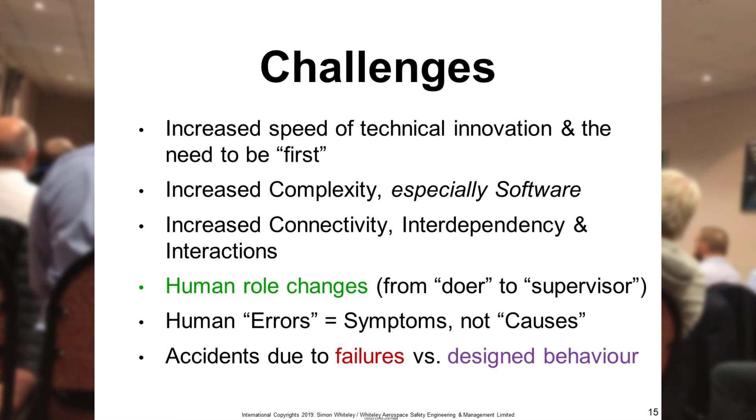Now there are a few ways to deal with complexity. The traditional approach is what might be called divide and conquer, or analytic reduction. So what we do is think about the physical aspects, the functional aspects, and divide them into distinct parts. Then we think about behavior, and divide behavior into distinct events over time, or what you might be familiar with as chains of events.

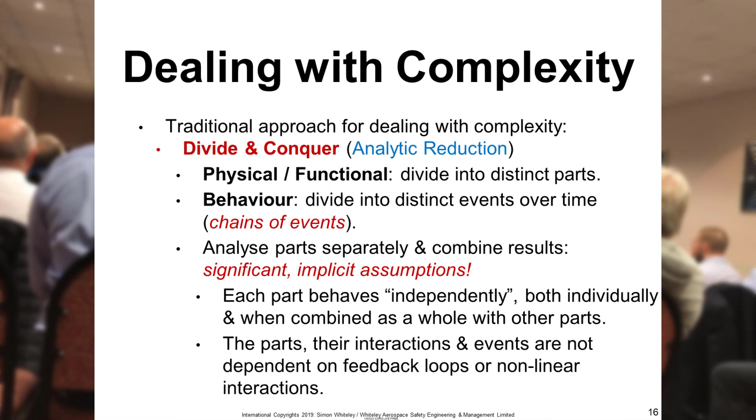Then we analyse those parts separately and combine the results. But by doing that, we make some significant but implicit assumptions, especially when the system is really complex. One is that we presume each part behaves independently, either individually or when combined as a whole with other parts, and that the parts themselves, their interactions and events, are not dependent on feedback loops or non-linear interactions.

So an approach to deal with complexity - it's called a new approach but it's been around for quite a while, and we use it as part of systems engineering - is to use systems theory, or the process of synthesis. So we think more about the holistic, the big picture, as opposed to focusing on division. We think that everything is part of a system, however we define that system, so it's got a boundary, it's got some interactions across the boundaries. We think about components of the system and interactions amongst them, and about feedback loops and emergent properties.

So this is where we start talking about STAMP. When we say STAMP, we're referring to an acronym that stands for Systems Theoretic Accident Model and Processes. So it's two broad things.

And it originates from - hands up who's familiar with Nancy Leveson from MIT? A few people? Hands up who have no idea who she is whatsoever? A few people, wow, more, that's great, okay. I'll let you find that out as your homework. So Nancy is a professor at MIT in the US.

She devised the STAMP-based approaches and wrote about them in her second book, Engineering a Safer World. She's very kindly made that book available for free, so if you go to the MIT Press website, you can download it as a PDF and read it at your leisure. Myself and Nancy also did a YouTube video introduction, which you're welcome to watch at that link - I'll give you the links later on.

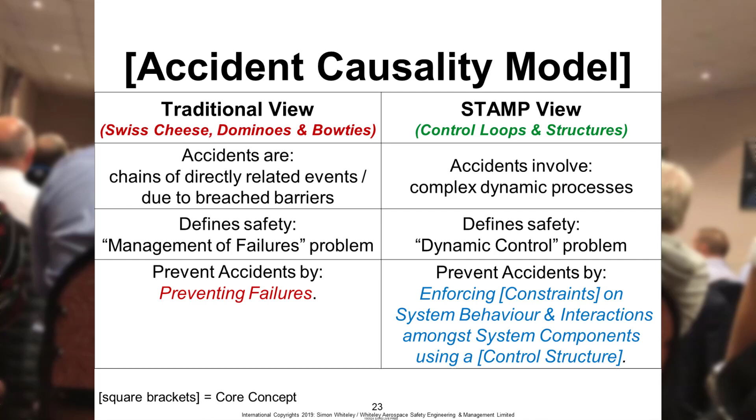And it essentially prevents accidents by enforcing what are called constraints or requirements on system behaviour and interactions amongst system components using a control structure. Now, I've used a lot of technical words there, and that's because the STAMP-based approach is based on systems theory and control theory, and that's where the language really comes from. So it'll be very familiar to systems engineers, maybe not so much to non-system engineers.

And the STAMP-based approach is very much focused around this concept - the concept of a control feedback loop. Hands up to see whether this is familiar to you. Does this look familiar to you? There's a few people there. Anybody it's not familiar to? No one wants to put a hand up. In a different guise, we've seen it, but not quite. Okay, well I'll talk a little bit about it just to give you a bit of insight.

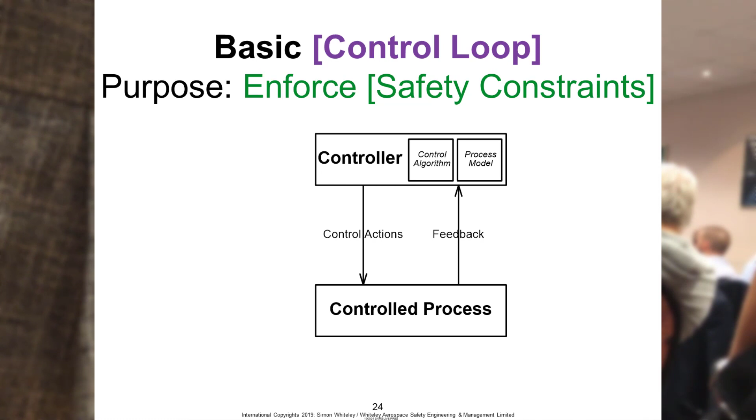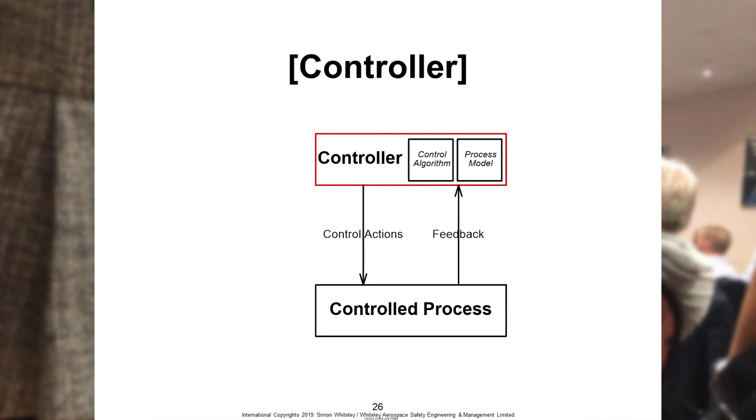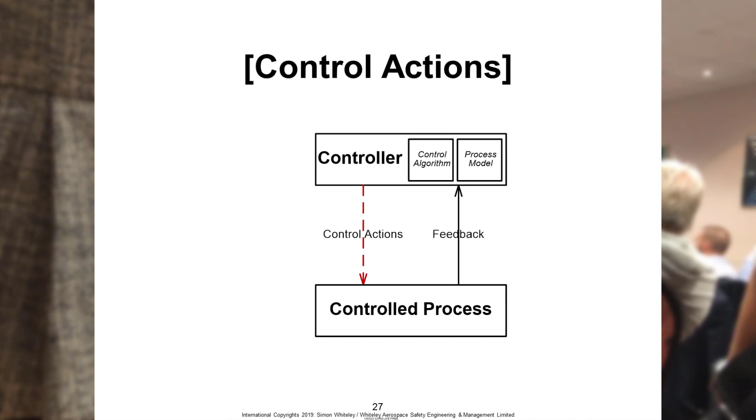So the basic intent is accidents are complex dynamic processes. So we think about managing safety by using these control loops. And conceptually, we have what's called a controlled process at the bottom. So this could be a physical process, it could be some equipment, it could be an organisation, it could be a team of people. It's abstract, it can be applied to anything like that. And that controlled process is under the conceptual control of a controller. That could be hardware, software, humans, organisational, however you see fit in the context of what you're looking at. And it controls the process through what are called control actions.

And when we're talking about what causes accidents, in the concept of STAMP, we talk about unsafe control actions. Now, when we're talking about accident investigation using the STAMP-based approach, we can't really use the term unsafe control actions because that implies judgment upon the actions of individuals that may have been killed. And so when we're doing an accident investigation, we want to avoid inappropriate judgment or biases. So when we're talking about accident analysis using STAMP, we refer to what are called contributory control actions. Conceptually, they are the same, but when you're dealing with accidents, it's not really appropriate to use judgmental language.

Now, there are four general types of contributory control actions. The first is a control action required for safety is not provided. And if you're familiar with the functional hazard analysis approach, that is very similar to loss of function.

An unsafe control action is provided. A potentially safe control action is provided too early or too late, or at the wrong time or in the wrong sequence - that's the concept of timing and sequencing. And then we've got a control action required for safety that is stopped too soon or applied too long, and that's about the duration of the control action. Does that make sense? Is everybody following that?

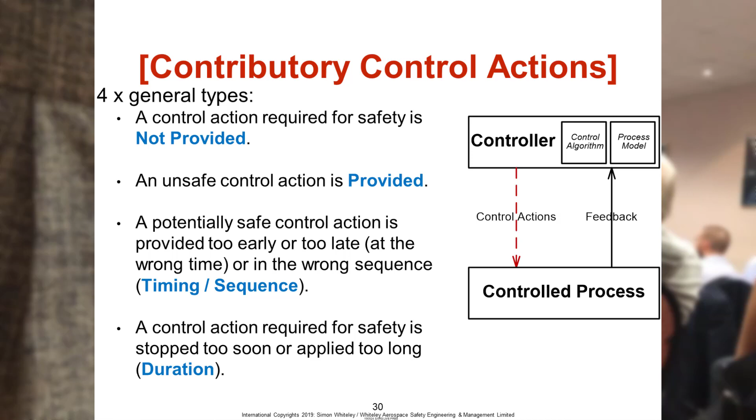Excellent. So once we've thought about the unsafe control actions, we then start to think about how does that feedback loop contribute to enabling that control action to occur. And so we think about looking round the control loop, looking at the controller, these concepts called algorithm and process model - I'll come to those - and then the feedback.

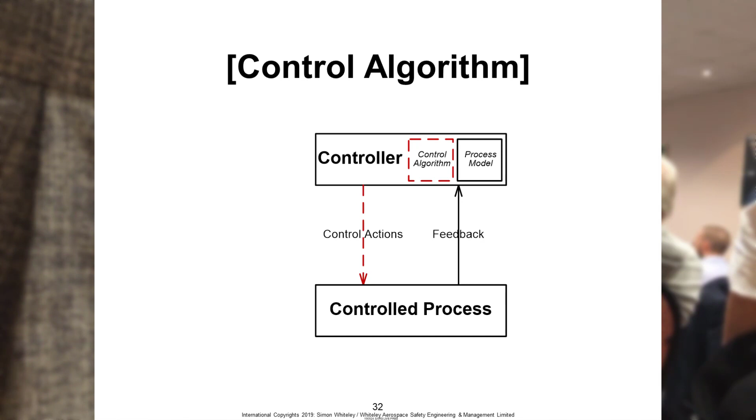So the first is a control algorithm. What's that? Well, conceptually, that's a label for something that defines the behavior of the controller. So if you're driving your car, your control algorithm is how to operate your vehicle - if you drive a manual car, how to use the gears and the clutch. If you drive an automatic car, the algorithm is knowing what to do when you come to a stop, and you don't take your foot off the brake and let it drive off on its own.

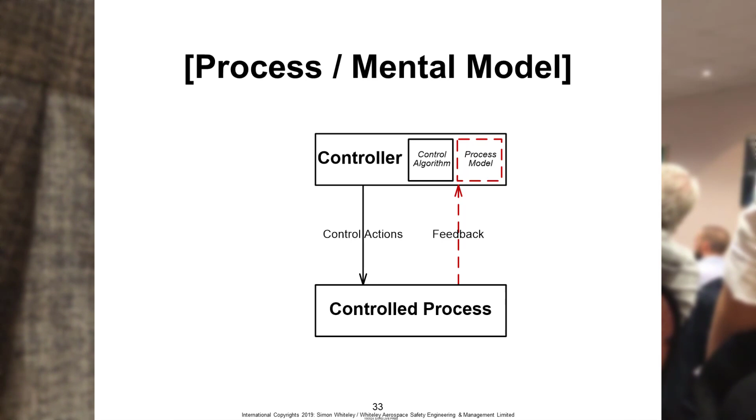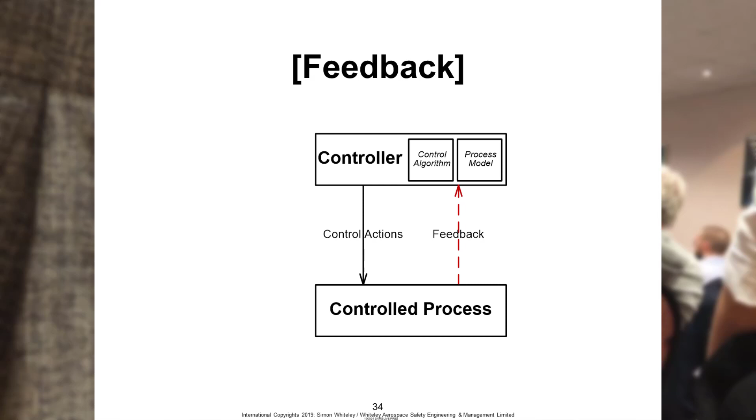The process model, or mental model if we're talking about a human, is essentially a model of what's going on in the control process - a representation of what's going on in this process. And it is based upon feedback. So feedback is provided to the controller, which updates its process model. The controller then uses that information and its algorithm to define how it provides control actions. Does that make sense? Excellent.

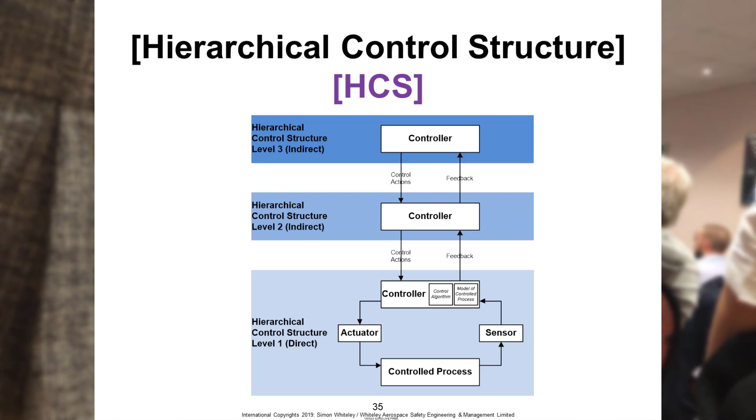Great. So once we've thought about one control loop, we then start thinking about looking at a hierarchy of these control loops. This allows you to think about physical processes. So if this is your brand new autonomous car, this is your autonomous AI controller, this is you sat in it - it's not a driver's seat anymore, so wherever you're sat in the car - and then above you it might be the designer of the autonomous vehicle providing you instructions on how to operate the car. These basic concepts of control loops and control structures enable you to model pretty much any system you can think of, whether it's computing or a social system, organizational, and it allows you to identify potential safety issues that you can then deal with.

Now, one of the most powerful things I think about the STAMP-based approach is the concept of these control structures, because it allows you to think about - this example is an air traffic control example - an aircraft and its trajectory, the aircrew on board, an air traffic controller, airport or ATC management, airline or operator, but it also allows you to think about the life cycle of the system: the system designers, the assumptions they make about the design, the operator, the maintenance structure, the emergency response structure, and then at the very top, if you want to go that far, you can look at governmental, legal and regulatory control structure. So I'm hoping by now you can see that you can use this for a very technical analysis of a complex system like a weapons system or an autonomous car, but you could also look more broadly at the sociotechnical context and how these systems are operated.

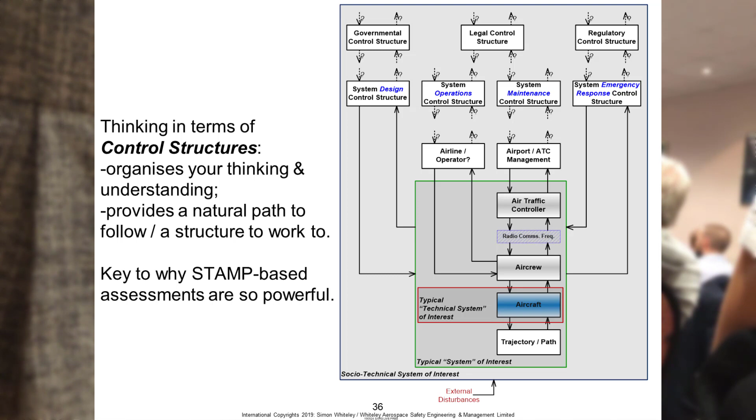Hands up who can tell me which accident this relates to. Tenerife - it is Tenerife, yes. What made you see that was Tenerife? Air traffic control, KLM aircraft.

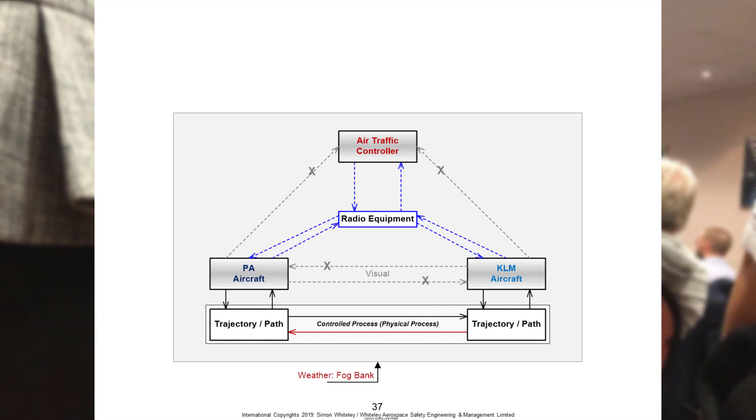Okay, yeah, excellent. So the first thing is this is just a very basic control structure, but you can see how much information you can cram into this just from a few boxes and a few arrows. Now this one's a bit fancier because it's got some colours and some dotted lines, but ultimately it's just some boxes arranged in a hierarchy with some arrows depicting feedback. So at the bottom here we've got the controlled process, the physical process, which is the trajectory, or more precisely keeping the trajectory of two aircraft away from each other. It's under the control of two aircraft and their aircrew, and then of course an air traffic controller at the top.

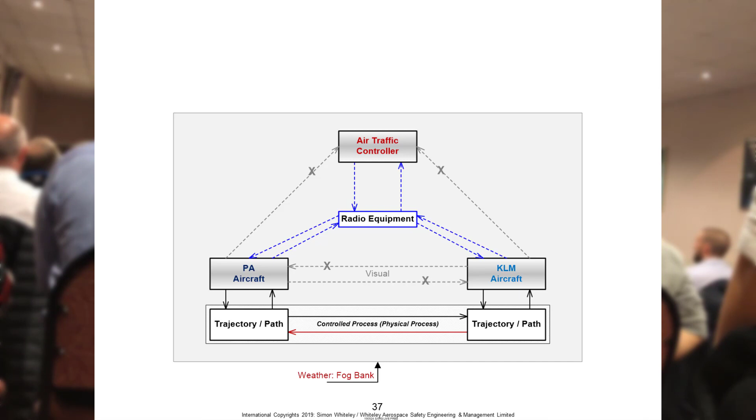Now this particular control structure shows two feedback loops between the air traffic controller and the aircraft. One is via the radio equipment and one is via visual feedback. So normally the air traffic controller can see out the window of the tower, but on this particular occasion, this particular airport was susceptible to significant fog that arrived very quickly. So all of a sudden you've got two huge 747s in the fog on the same piece of tarmac. They're talking on the radios, but you can't see them out the window. So the feedback to the air traffic controller is lost. And so you're essentially reliant on people talking over the radio to make sure that they don't crash into each other. And we know that that was unsuccessful.

It appears from the cockpit voice recorder that the captain thought that they'd been given clearance to take off and that the runway was clear. This aircraft was still on the runway and then began to take off. Now the flight engineer, if you look at the transcript, actually heard the ambiguity in the radio transmissions and questioned, is this guy actually clear? Unfortunately there wasn't enough time to stop the plane and prevent an accident.

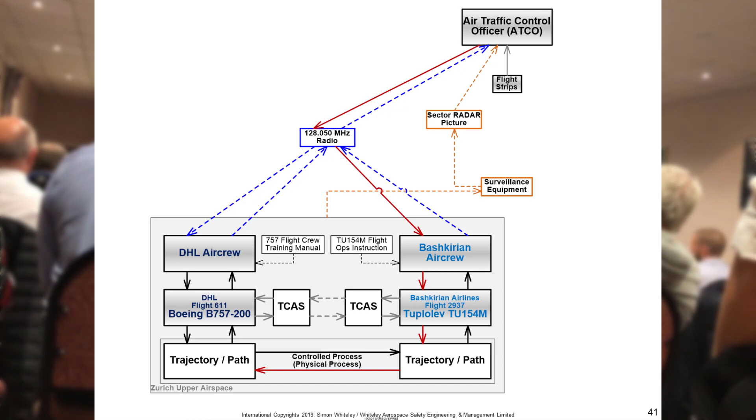So the TCAS says go one way, they go that way. Whereas the Russian crew, as part of their training, they're told to do what the air traffic controller tells them to do. So the air traffic controller told them to take a particular evasive action, which was contrary to the TCAS. But their procedures, their rules were do what the air traffic controller said, which was contrary to TCAS, and they collided. It was very serious.

Now we can look at this one even more. So it wasn't just pilots or aircraft or failures or anything like that. There were issues more deeper in the system.

So in this case, we've got the actual air traffic control technology. That includes radio communications, telephone communications, short-term conflict alerts. So they have a radar screen that tells them when aircraft are on a trajectory. We've got a radar picture.

Now, on this particular occasion, there are two radar sectors. So this sector, this technology looks after this piece of airspace, and this sector looks after this piece of airspace. Now, normally, there will be two air traffic controllers, one for each sector. But on this particular occasion, this one air traffic controller was looking after both sectors.

And this aircraft arrived, it was a bit of a disturbance, it was a late arrival, and it distracted this air traffic controller from looking after both of these sectors, and that's what contributed to him not seeing the aircraft on a conflicting trajectory. Now, there are many reasons why that was the case, but what I want to highlight here is just by representing the control structure, you're able to see the difference between work as imagined, if that rings a bell, and work as done, how it actually is, how it's tolerated by the organisation.

Now, this particular air traffic control organisation tolerated this operation for many years. So they were operating at increased risk for a long time before the slices of the holes in the cheese aligned and we had this accident.

Now, I talk about control loops and control structure modelling as almost like a jigsaw. You're trying to look for the jigsaw pieces in the accident, the control loops, and you're trying to see how they fit together in a hierarchy. So it is really like trying to put a jigsaw puzzle together.

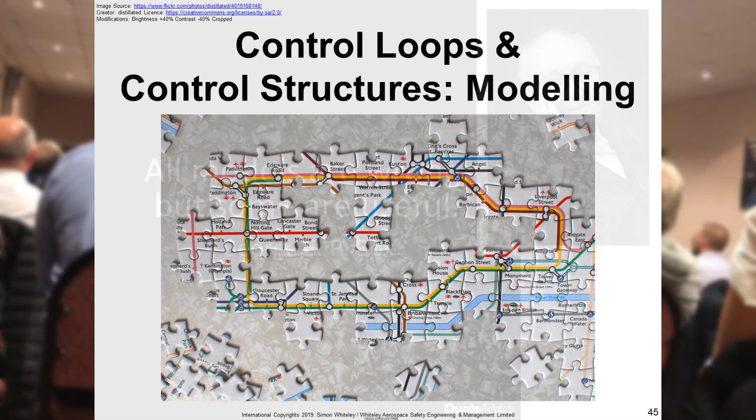But of course, this gentleman, George E.P. Box, you're probably familiar with him, maybe not. He's a world-famous extraordinaire statistician, and he said once, all models are wrong, but some are useful. You might have heard of that. No? Okay. But he also said that we need to remember that all models are wrong. The practical question is how wrong do they have to be to not be useful?

So all I'm really highlighting there is that these are control structure models. They're not the real system. They're our understanding of the system, and they enable us to analyse these models and get valuable results.

Okay, so what are the STAMP-based processes? I'm going to give you some bonus information here. I'm not just going to talk about CAST, I'm also going to talk about STPA. There are technically 4 model-based analysis processes based on STAMP. So when we say I'm going to do a STAMP analysis, you can ask somebody which one do you mean? STECA, STPA, STPA-Sec or CAST? Which one are you talking about?

STECA is what's called Systems Theoretic Early Concept Analysis. I'm sorry about the acronyms, I didn't choose them, they're a bit of a mouthful. But this is essentially applying the STAMP-based approach during early concept analysis. Before you've got a design, before you've got a concept of operations, you can literally take a paragraph of text about what you intend to do, and start to iterate that using STECA to develop a more robust, less risk design, very early in the concept stage.

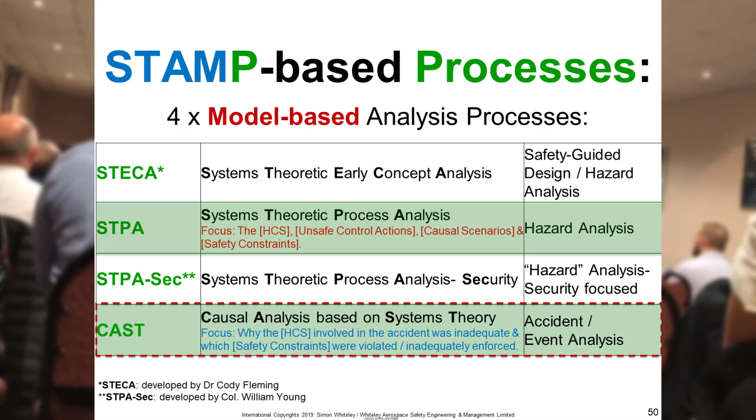STPA SEC is basically a cybersecurity focused STPA. And then CAST, accident analysis, which we'll talk about today. That stands for Causal Analysis based on systems theory. So this is looking at an event, an incident, a near miss, or an accident, so after the fact.

Right then, so CAST accident analysis overview. Hands up who does investigations as part of their work or has done it in the past. You do. Okay, great, excellent.

So this is a very high level investigation process. First you observe the accident scene or the situation that you're dealing with. You then document what you've seen, and then you plan what are we going to do to investigate this, what resources do we need, what specialists. If we're doing an aircraft accident investigation, we need to read the data recorders, we might need an engine specialist, we might need an aircrew specialist, all of those things.

As part of that activity of doing an investigation, we will establish some facts, we will do some form of analysis, maybe a bow tie analysis, something like that. We will establish some findings based on that analysis, form some conclusions, and make some recommendations. Now when we're talking about doing a CAST accident analysis, we're referring to this phase, this part of the overall investigation process. So CAST is not the investigation process, it is the analysis part of an investigation process. Does that make sense? Everybody, great, excellent, okay.

Now as you get more advanced using CAST, more experienced, you could actually use CAST accident analysis to help you plan. So as you saw from that control structure model, when you receive the first information about an incident, you will start to build that control structure model, and that will help tell you what specialisms you need as part of your investigation. So if you see, in the case of the Uberlingen accident, the Russian air crew followed what the air traffic controller did, which was in accordance with their procedures.

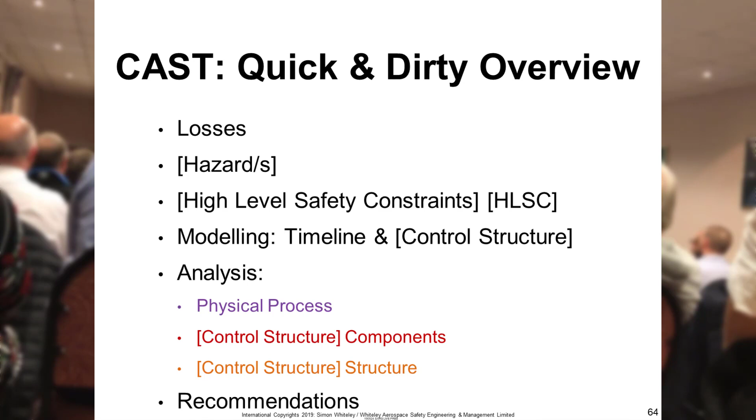Then we do some modelling, so we'll create a timeline of the accident if we have the information available, and then we create the control structure model. Then we do the analysis of the model, and that is done in 3 parts. The first part is the physical process, so what is the physical mechanism of the accident? Was it a failure? Was it an impact? Was it a loss of safe separation? Then we look at the control structure, and first we look at the components of that structure, whether it's hardware, software, humans, organisations, and then we look at the structure of that control structure and how that contributed to the accident, and then we make recommendations.

Excellent. Is everybody following where I am so far? Are we all? Great. So then, let's get on the case study.

So the aircraft fan cowl door loss, London, United Kingdom, May 2013. So this case study is based on one source of information, which is the official investigation created by the Air Accidents Investigation Branch.

Essentially, and I'm not going to make you read all this, essentially an aircraft took off from London Heathrow Airport with the fan cowl doors on the engines unlocked. So as the aircraft sped down the runway, the airflow over the airframe caused the doors to open and essentially ripped off as the aircraft took off. And in the doors being ripped off, the right-hand engine suffered significant damage to the fuel system, the hydraulic systems, and the engine control wiring on the outside.

And later, while the aircraft was flying around over London, a fire developed in the right-hand engine, which required them to shut the engine down. So we had a 2-engine aircraft flying low over London with 1 engine, and then they fortunately safely landed at Heathrow and they put the fire out, everybody evacuated. In a nutshell, that's what happened.

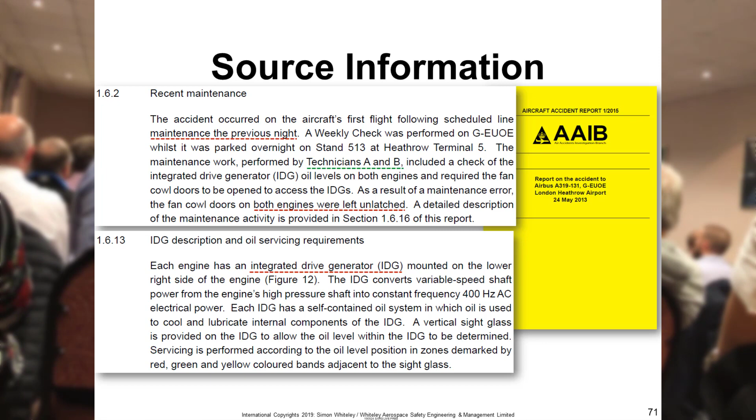Now, when we go back to how the aircraft doors basically got broken off, the reason the doors were unlocked was because of a recent maintenance that was done overnight, literally the night before the accident. So 2 maintainers were tasked with doing what are called daily and weekly checks, and as part of the weekly checks they are required to, oh there we go, there's a nice picture there.

So this is the fan cowl door, there's 2, one on each side of the engine, and they essentially open outwards, and you can see just about there at the bottom of the engine there is this thing called the integrated drive generator, and it has an oil level that they have to check.

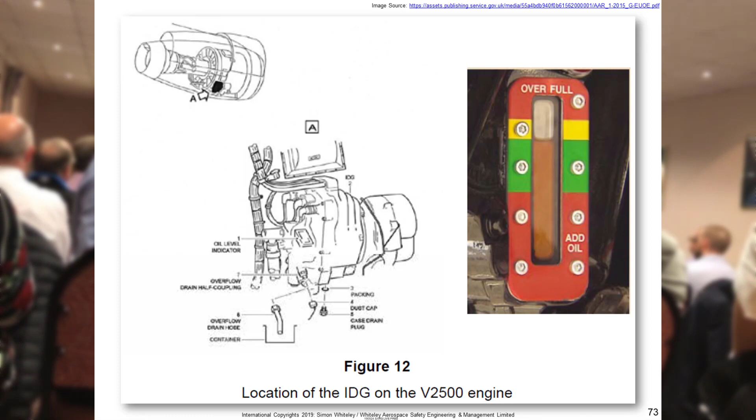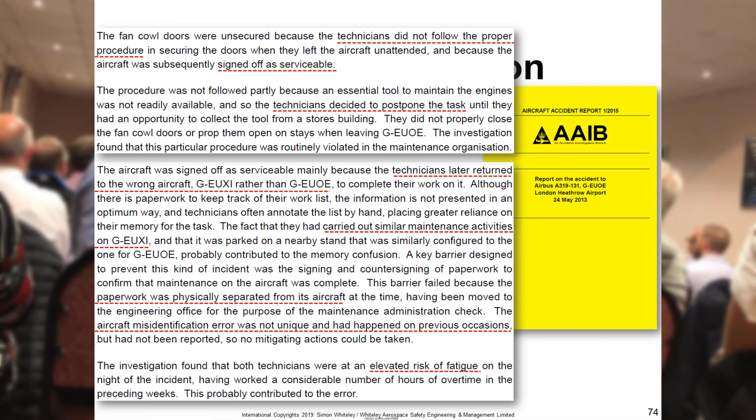So during the nighttime maintenance they opened the doors, they checked the oil level, it was low, but they didn't have the oil guns, the oil top-up tools to fill the oil up. So what they did, instead of closing and locking the doors, they left them unlatched, unlocked, just sort of closed. Now there is a procedure associated with opening and closing this, but because of standard practice at the airline, they just closed them, didn't lock them, for various reasons.

So they then went off to complete the rest of their shift. They had a number of different aircraft to maintain. So the first aircraft was this one. This aircraft was the second aircraft. So they opened the doors but didn't close them and lock them. They went to this other aircraft, that aircraft, and then back to number 6.

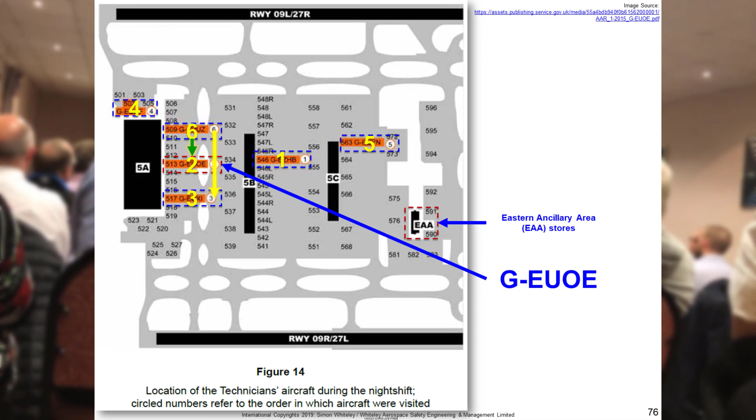And then when they got to number 6, instead of going back to number 2, they drove straight past it to number 3, which was an aircraft they'd already worked on that night. Now there are a number of reasons why that was, but we'll come back to that.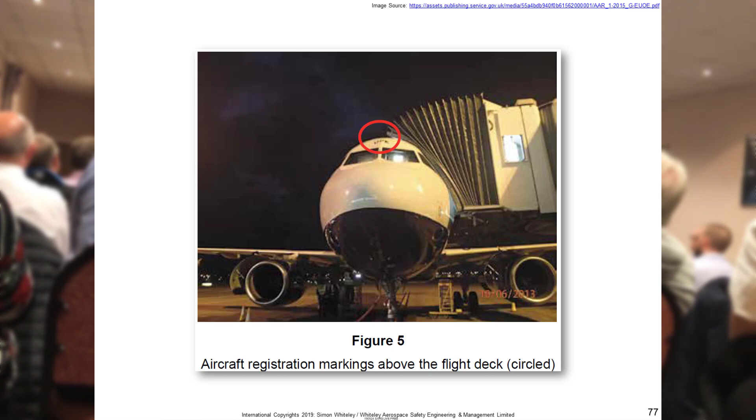The aircraft registration is printed on the tail, on the nose, and on the landing gear door here. But the technicians were working on the engines, which, I mean, they're not massive aeroplanes, these, but they're not small. So they were quite far away from them.

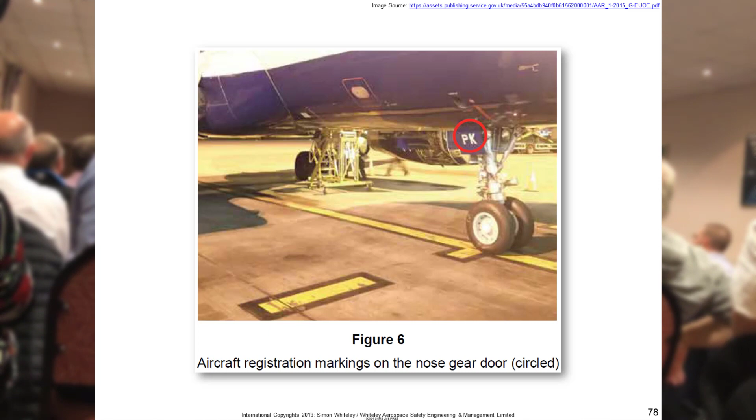And they essentially went back to the wrong aircraft, checked this aircraft, opened the doors. They were a bit surprised to find that the doors were already locked. And they were thinking, well, that's a bit strange. Who's been and worked on this aircraft and kindly locked the doors for us?

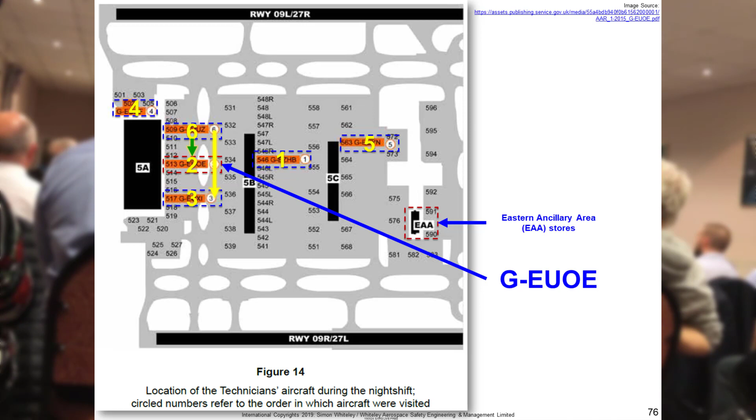But they didn't recognise that as a bit strange. They found that the oil levels were back within tolerances, as you'd expect, because it's a different aircraft. And then they went on their merry way, finished work, and then later on the aircraft was taken and they had an accident.

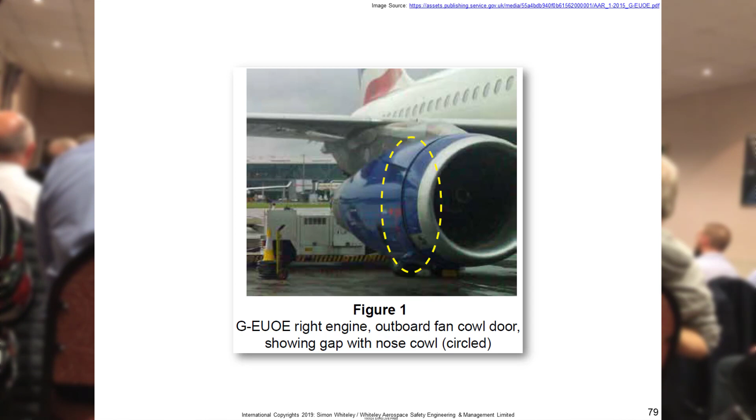So these photos were taken literally on the morning of the accident by somebody else working at the airline, who was taking photos of the aircraft for some reason. You can see quite clearly, well, obviously this crack is only like an inch, so if you don't know what you're looking at, like as a flight attendant or a tug driver, you wouldn't necessarily look at the aircraft and realise that fan cowl door is unlocked. And then the same here, you can see the two latches below the engine.

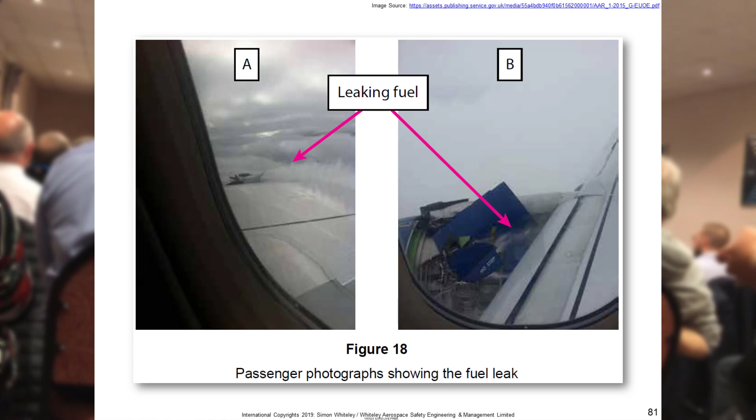As the aircraft took off, the fan cowl doors got ripped off. There was some leaking fuel, lots of screaming passengers. The aircraft took off in this direction, flew round, and then returned to Heathrow.

The aircrew themselves didn't know what had happened, because whilst they were taking off, you might be familiar with the concept of a sterile cockpit. So essentially during safety critical operations like takeoff and landing, the pilots should not be disturbed. They just need to operate the aircraft so they're not disturbed and cause an accident.

And when they took off, there were lots of passengers telling the flight attendants, hey, there's something not right here. They tried to call the captain on the flight deck and he just ignored the phone because they were operating in a safety critical phase of flight.

And it was only later, at this point, almost 7 minutes after takeoff, that they first talked to the senior cabin crew member and found out there was a problem. Then they had another conversation, and it was basically 13 minutes later when they realised there was a fuel leak. And then they returned to the airfield.

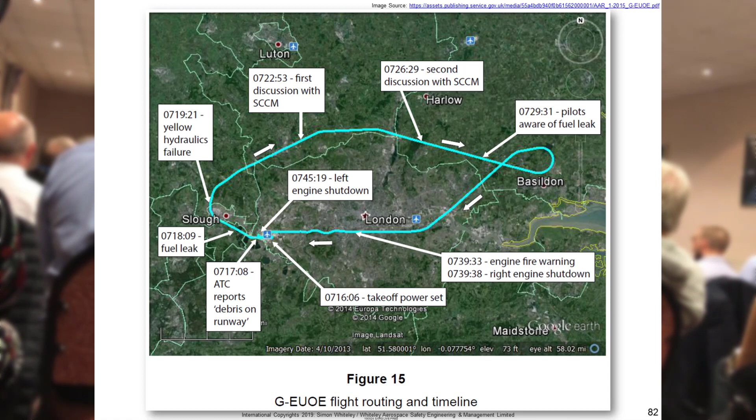There was an engine fire warning on approach. They shut the engine down, and then they landed safely at the airfield.

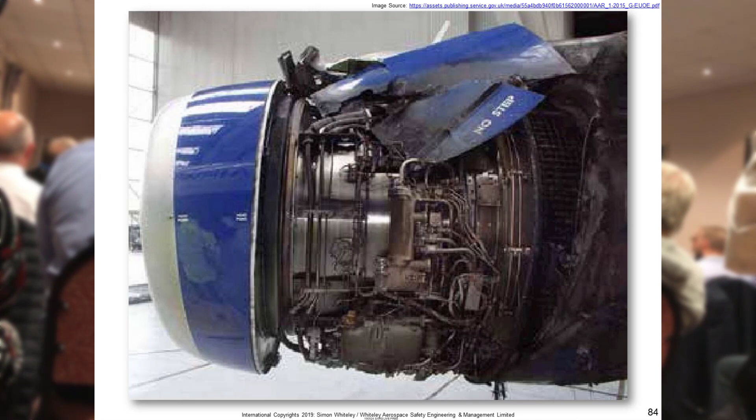And this is a picture of the engine with the doors ripped off. This is the right-hand engine. This was damaged the most. There was damage to the fuel manifold - that's where the fuel leaked from, that's where the fire started. And also there were hydraulic leaks.

Okay, so the foundation phase. I'm just thinking at the time now. Have we got time to talk about this too much?

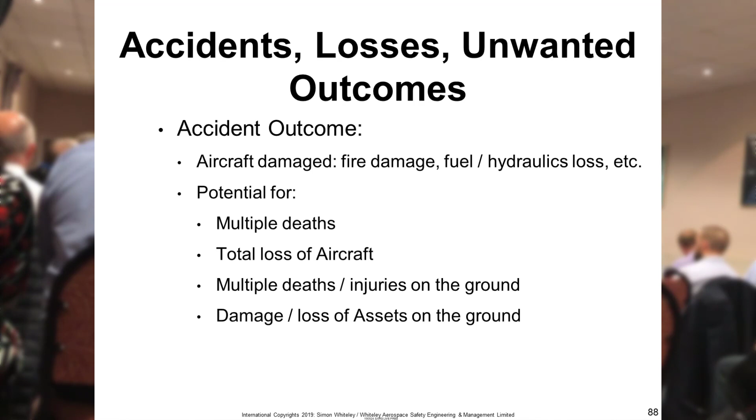So I said at the beginning of the analysis process, you define the losses or accidents, and you think about what the outcomes are. The aircraft was damaged, there was a fire, there was a loss of fuel, potential for multiple deaths, loss of the aircraft, injuries on the ground if the aircraft came down, share price devaluation. So you'll notice this is not just about safety. If you want to go broader than safety, you can think about business operation effects, negative media coverage, brand damage, airport ATC disruption. And then we talk about defining a hazard.

Now, hands up who's familiar with the age-old argument about what's a hazard and how painful that argument is. A few people.

Okay, well, I won't go into it here. Those that don't know, you're lucky, it's great.

When we're doing a stamp-based analysis, I need to emphasize that the concept of a hazard is different, more constrained, than the concept of a hazard you're used to dealing with in your safety assessments. If people talk about comparing stamp-based analyses with other-based analyses, just think: they've got a different definition of a hazard there, so we can't really directly compare them.

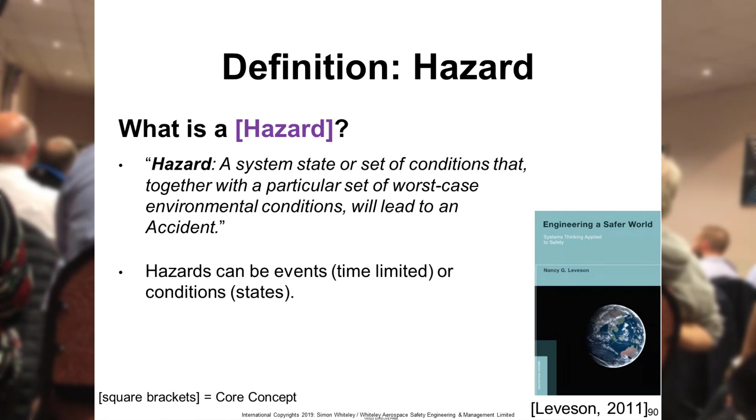In this context, the hazard we're interested in most is the aircraft was released for service in an unsafe condition. That hazard can be broken down into: fan cowl doors not closed and secured for or during flight. That has two high-level safety constraints, which are the things the control structure, those control loops, should enforce. The control structure shall ensure that the fan cowl doors are closed and secured before flight, and that the fan cowl doors remain closed and secured during flight.

The reason I've separated those out is because securing the doors before flight involves humans, but when the aircraft is in the air, to keep the doors secured and closed there's nobody outside trying to hold the doors. It's going to be a technical mitigation, so you can start to think about aircraft design.

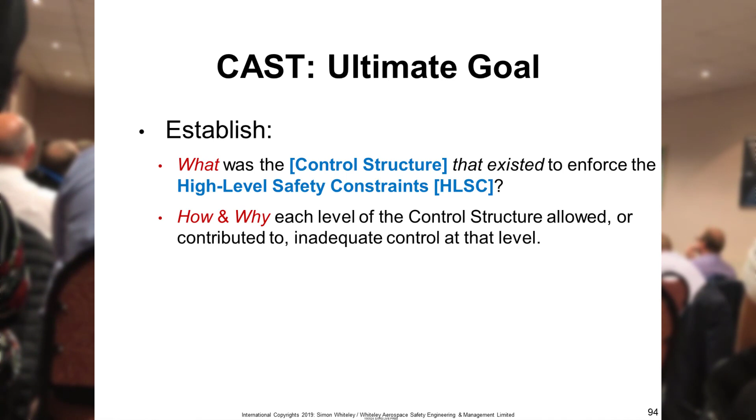So the ultimate goal, as I said, was what control structure existed to enforce the high-level safety constraints, and how and why each level of that control structure allowed or contributed to inadequate control at that level. So we do some control structure modelling.

I modelled three different control structures because this was quite a complex accident and I wanted to look at the different aspects. We don't have time to go into this in detail, but this is the operations control structure: the two aircrew, the aircraft itself, the air traffic controller, airport fire and rescue services, the operator, British Airways, and the maintenance organisation.

Then I've got the maintenance control structure, which is what I'm going to focus on in a moment: the two maintenance technicians, the aircraft, the technical log, the work allocation sheet, the aircraft maintenance manual, Airbus and International Aero Engines, the maintenance management organisation, and at the top, the regulator.

And then we've got a design control structure. This is about the design of the aircraft itself and why the fan cowl doors were designed the way that they were. And then the analysis phase — this is where we get into the detail.

So we're talking about this control structure, and I'm going to focus on these two technicians. As part of the analysis phase, we do it in three parts: we look at the physical process, the components, and then the structure. As part of the physical process, clearly it's the engine, the fan cowl doors, the latches themselves.

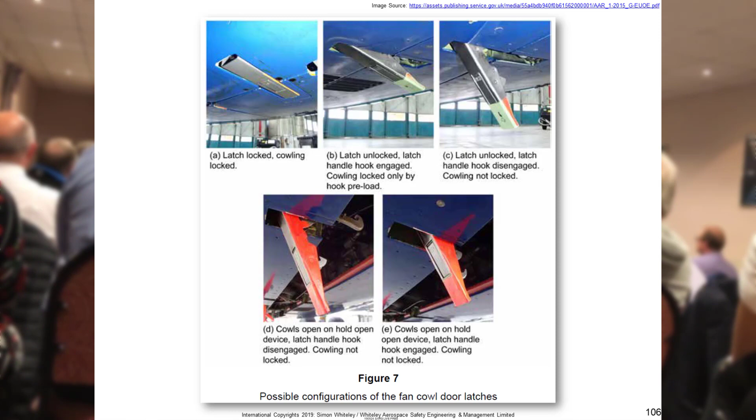The latches are unpainted. They should actually be painted like this to make them more visible, more conspicuous. So as part of the physical equipment analysis, we're talking about the Airbus A319 fan cowl doors. There were some physical failures in that the doors detached, and also there was inadequate high visibility paint.

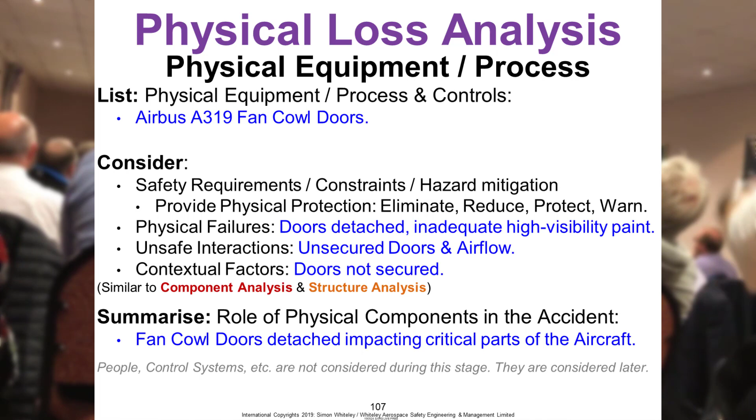There were some unsafe interactions between the unsecured doors and the airflow, some contextual factors — the doors were not secured and locked. A summary of the role of physical components in this accident is that the fan cowl doors detached, impacting critical parts of the aircraft. So there are some unanswered questions.

In terms of the certification requirements — these are the things that define how the aircraft should be designed and certified — the doors themselves were defined as structure of the aircraft, and they must sustain all the flight loads. Clearly these doors didn't sustain the flight loads because they got ripped off. So straight away, there's some avenue of inquiry from a certification and technical design perspective.

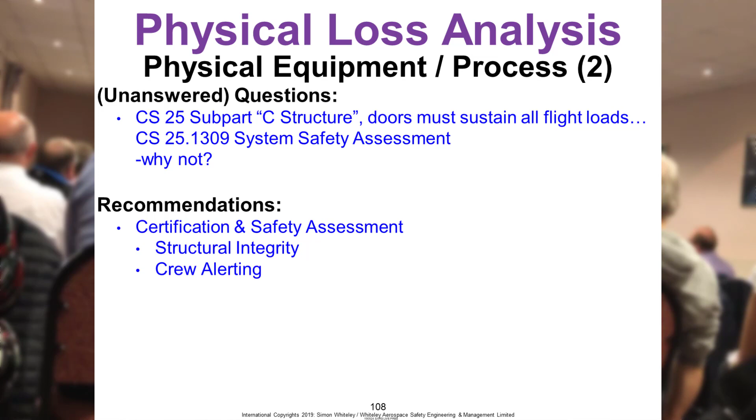Then we've got the System Safety Assessment, CS 25.1309 — that's the requirement for doing a system safety assessment. In this particular accident, Airbus did not do that safety assessment, but it wasn't established by the investigation why that was. Recommendations look at certification and safety assessment, structural integrity, and crew alerting. From a passenger door perspective, the crew would be alerted if doors were unlocked, but these fan cowl doors have no crew alerting function.

So then we look at the actual components in the structure. Any one of these items you analyse using this approach, and I don't know if you can see that at the back, that's probably a bit small.

There are essentially 3 phases to the component analysis. The first is to look at the requirements and control actions - what safety-related responsibilities and safety-related constraints these people had, and what were the contributory control actions. Then we attempt to explain those actions or behaviours by looking at their mental model, which we spoke about earlier. Then contextual factors - what context were decisions made - and ultimately what other questions should we ask as part of the investigation.

So safety-related roles and responsibilities: they need to perform the daily and weekly checks in accordance with procedures. They also need to report anomalies to management - if they identify an issue with whatever it is they're doing, they have a responsibility to report it back to management so that they can deal with it.

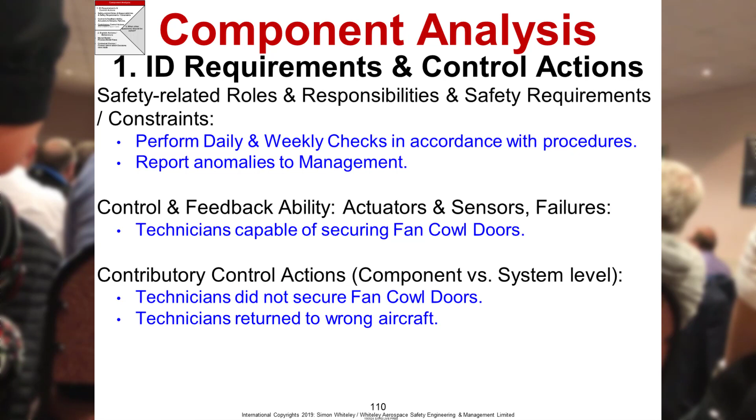In terms of control and feedback ability, the technicians didn't have any physical issues, they were not ill or anything like that. They were capable of securing the fan cowl doors, but in terms of control actions, they did not - they did not provide the control action to secure the fan cowl doors. The technicians also then returned to the wrong aircraft, so they were doing action on the wrong aircraft, not the one that they should have been working on.

So what was their mental model? What were their process model flaws? Well, the main one is that they thought that they were working on the correct aircraft. They didn't realise they weren't working on the correct aircraft.

So why was that? What are the contextual factors associated with that? Well, they had some disrupted activity - some of the aircraft that they were due to maintain didn't arrive on time because it's quite a dynamic operating environment, and they were parked at different stands. The technical log, the aircraft log that defines the activities performed on the aircraft, was not actually on board - it was removed for administrative reasons, so they didn't have that feedback of seeing the log on board the aircraft.

Equipment availability - the IDG oil guns were not available at the time they needed them, and they were far away from where they were working, so they had to stop their task, go to a different part of the airfield, and then return.

Inadequate feedback upon returning to the aircraft - when they returned to the wrong aircraft, it was not immediately clear to them that they were working with the wrong aircraft. And then fatigue, shift working, overtime - there were a lot of maintainers in this operation, but they were doing a lot of overtime, there was a lot of work they needed to do. I think they'd worked something like 70 hours in the previous week, so they were pretty fatigued.

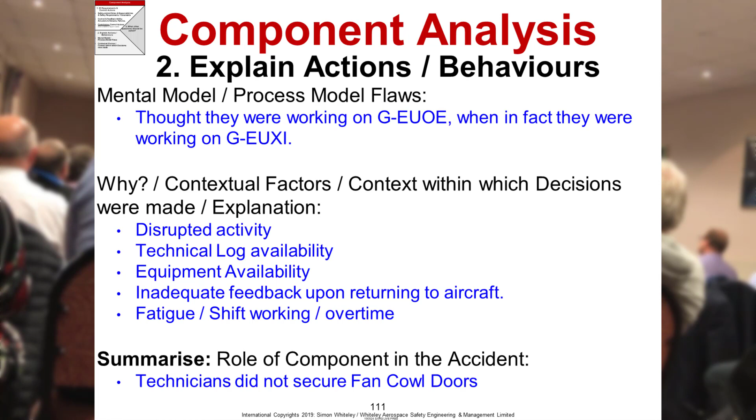And then in terms of the technicians, a summary of the role of that component in the accident: the technicians did not secure the fan cowl doors.

Some unanswered questions: why did the technicians not verify what aircraft they were working on? That wasn't established as part of the investigation - so as part of our investigation, we go and interview people and talk to them. Why did the technicians not close the loop on who had completed their task? When they returned to an aircraft to find it in a different state to what they left it, why didn't they follow up with management and find out what's going on? And then we make some recommendations.

Now, due to time, it is getting quite on now, I'm going to move straight on to the structure analysis. Normally you would do an analysis of each of these controllers and then move on to the structure analysis, but we don't have time to do all of that now.

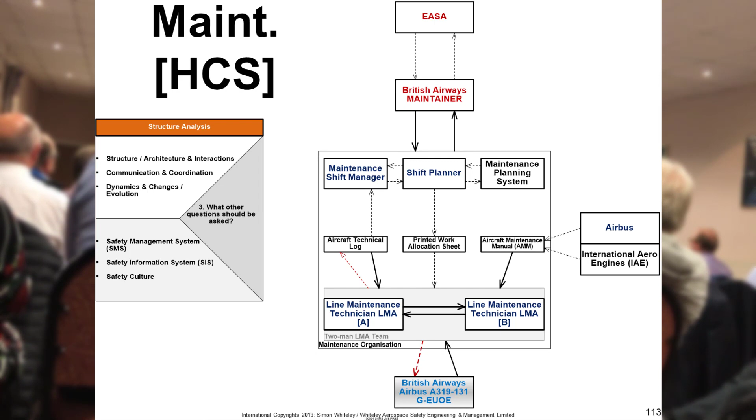So this again covers 6 broad topics. The first is, what structure, architecture and interactions contributed to this particular accident?

The technicians began the shift together, but due to the nature of the work, they had to later split into separate vehicles. At the start of the shift they were in the same vehicle; at the end of the shift they had to go in separate vehicles because one of the technicians had to pick up some equipment from a different part of the airport while the other technician was doing some work with somebody else.

The remote locations of equipment meant responsibility for ensuring adequate control of maintenance per aircraft was inadequately allocated and performed. What I mean by that is they had the 2 LMA technicians, but also a licensed engineer working on the aircraft, doing different tasks, but they weren't coordinated together.

Communication and coordination: the technicians, engineers, and maintenance management staff only really talked to each other when they went back to the crew room, not necessarily as part of the tasks.

Dynamics and changes, evolution. As mentioned, the technical log is normally on board the aircraft when maintenance is done, but for administrative reasons it was removed from the aircraft and taken back to the maintenance office, which was like a 15-minute drive away from the tasks they were doing.

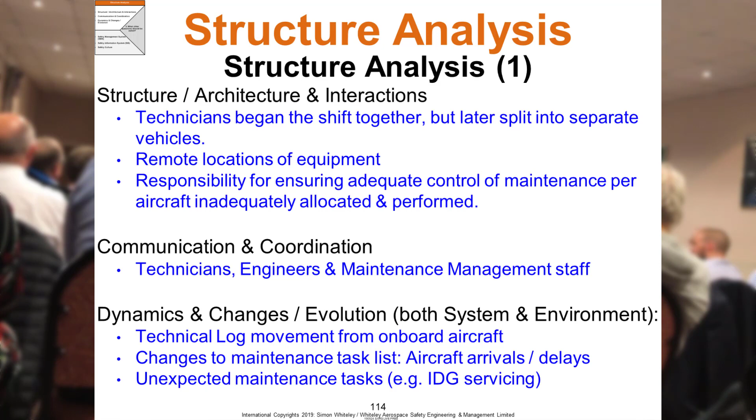There were changes to the maintenance task list due to aircraft arrivals and delays, and unexpected maintenance tasks. The reason they had to open the fan cowl doors was to check the oil levels, but only about 3% of the time is it necessary to actually change the oil. So they don't normally carry the oil filling equipment - it's only on the rare occasion.

In terms of the safety management system, the SMS, we talked about fatigue risk management. There was no fatigue risk management effort required or implemented - it was all down to the European working time regulations.

Then equipment availability: aircraft released to service post-maintenance. So when the work had been done on the aircraft, how that aircraft is handed over to the pilots was not looked at in any detail.

Safety information system: it's apparent that working on the wrong aircraft had happened quite a few times in the past, but it was not made available to management, so they didn't know it was a threat that needed to be dealt with. The work being completed by others was also quite a common occurrence, but it wasn't reported, so they didn't know about it.

And then safety culture. As I mentioned, anomaly reporting, work being completed by others, closing the loop on that, and then procedure compliance - they left the aircraft in an unsafe state, which was contrary to procedures, but that was normal practice at the airline at the time.

And then contextual factors - so I've mentioned overtime working.

So summarising the role of the structure in the accident then: availability of equipment and technical logs, along with unexpected servicing activity, contributed to the technicians completing tasks on the wrong aircraft, and then some unanswered questions.

Why were the technical logs removed from the aircraft? So in a nutshell, that is a very fast, very rapid CAST accident analysis.

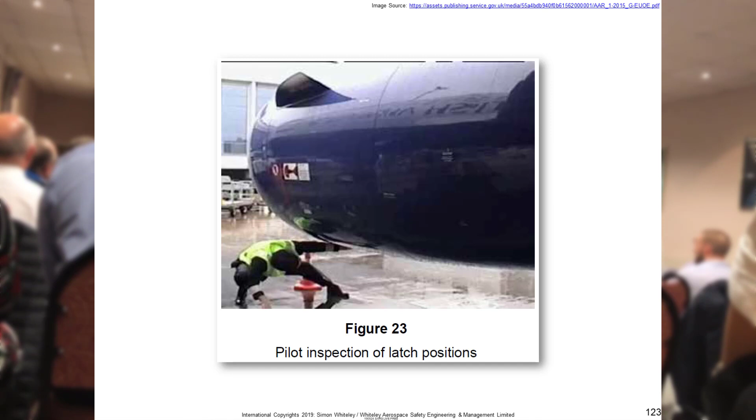We could talk about the design phase, but we don't have time. So in summary, the immediate cause as stipulated in the investigation report was that the fan cowl doors were not closed and secured following maintenance activity, such that the aircraft was in an unsafe condition for flight.

The main causal factors were that the technicians did not comply with the procedures, the fan cowl doors were left in an unsafe condition following overnight maintenance, the aircraft was signed off as serviceable, and pre-departure walk-around inspections did not identify that fan cowl doors on both engines were unlatched.

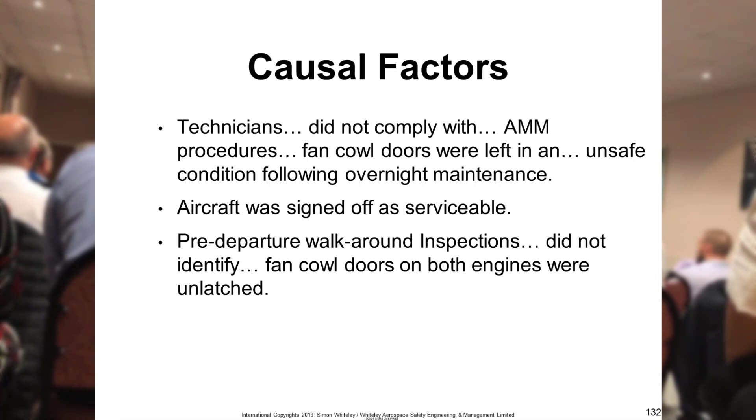So that's just 3 causal factors. How many did we speak about over the course of the last hour? It was many more than that.

Contributory factors: the fan cowl door latching system design, so the latch positioning on the bottom of the engine. Reduced conspicuity of the latches, so the high visibility paint finish was chipped off. And the technician's decision that further reduced the conspicuity of the latches - by that I mean that when they closed the fan cowl doors, they didn't lock them.

As part of the procedure, they don't lock the latches, but arrange them so they stick down further. But because they didn't, you couldn't see them very well.

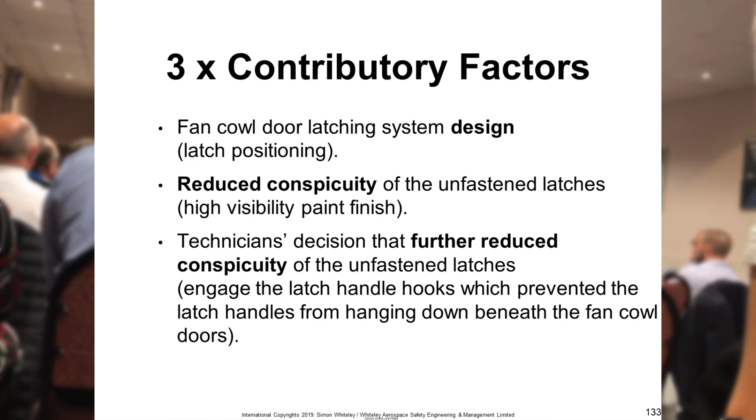So there were some recommendations. Three were for the European Aviation Safety Agency, looking at fatigue risk management, and for Airbus, a door latch/unlatch warning, and also to include fan cowl doors in the system safety assessment. That's the design aspects. BA was told to amend training, since training is always the first thing everyone goes to, and also to review evacuation procedures.

Now it's important to understand that as this investigation was ongoing, the airline was obviously making safety changes. So when you do your investigation, it's not necessarily of the system that existed at the time your accident occurred.

Some recommendations: pre-flight walk-around inspection effectiveness, post-maintenance inspection effectiveness, specific maintainer training, tasks and fatigue, stop removing technical logs from the aircraft, change the maintenance shift tasking and organisation to ensure appropriate coordination amongst maintainers, adding a lockout tagout lanyard to the flight deck, like a big sticker on the dashboard that says this aircraft is under maintenance, implement maintenance shift changes to manage fatigue, and address passenger evacuation with luggage and personal belongings.

That's always a big one. So some unanswered questions: technician behaviour upon finding their work done - why did they behave that way? Maintenance management, schedule, structure and information - why did they structure the work in that way? Fatigue risk management, pilots and flight crew interactions, pilot and fire rescue chief interactions, and pilot behaviour.